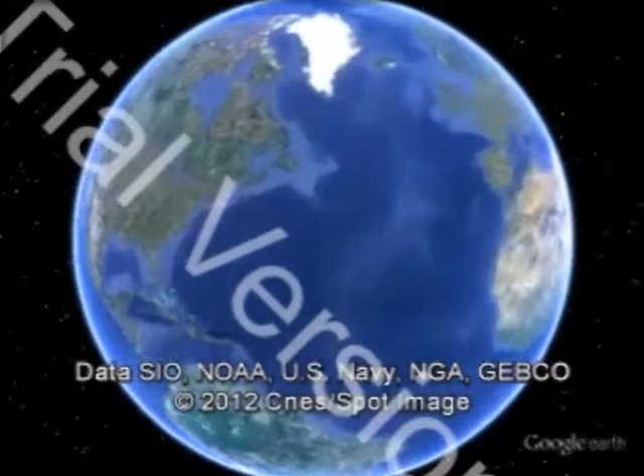The following is a design proposal to turn Mamourah community into a sustainable community. Mamourah is located in Alexandria, Egypt, and the proposal considers issues of sustainability, responding to the necessity to build a city generating its own economy and using green technology and integrating resource-like elements that provoke minimum impact on the surrounding.

This will be done using the 3 pillars of sustainability: social, economic, and environmental. The city will encourage people to walk instead of driving, and give facilities for recycling and optimizing the use of green technology, turning Mamourah into a sustainable, zero-carbon digital city which encourages a knowledge society.

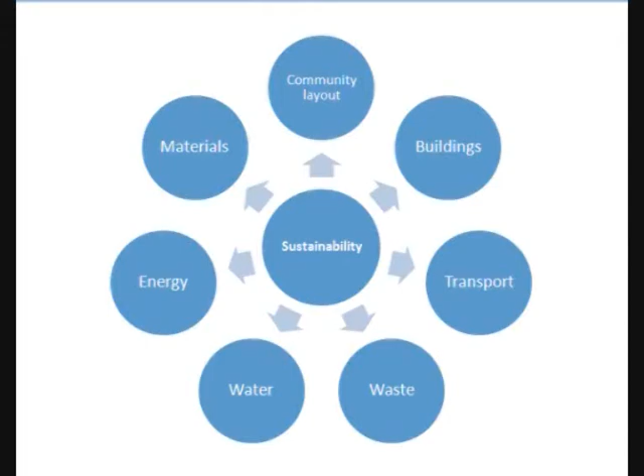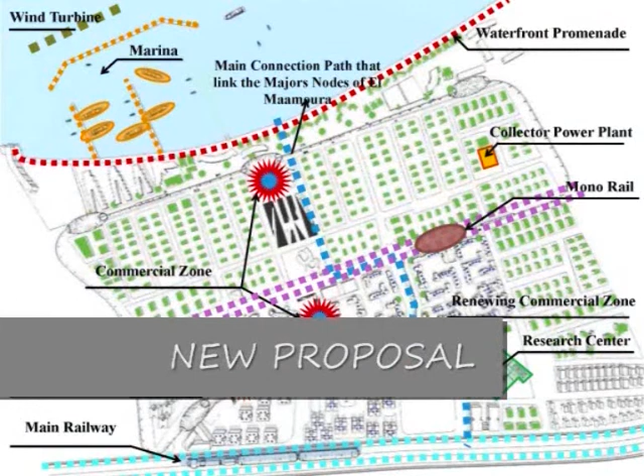This will be done using 7 main principles of sustainability under the categories of LEED, which are community layout, buildings, transport, energy, water, waste, and materials, to turn the old proposal and master plan of Mamourah into a new proposal which encourages a pedestrian-friendly community.

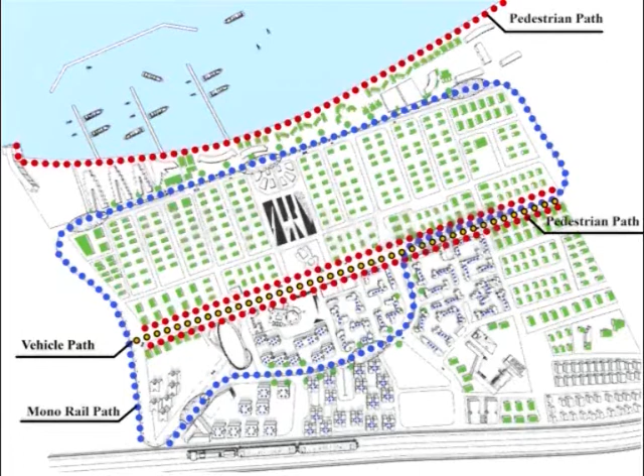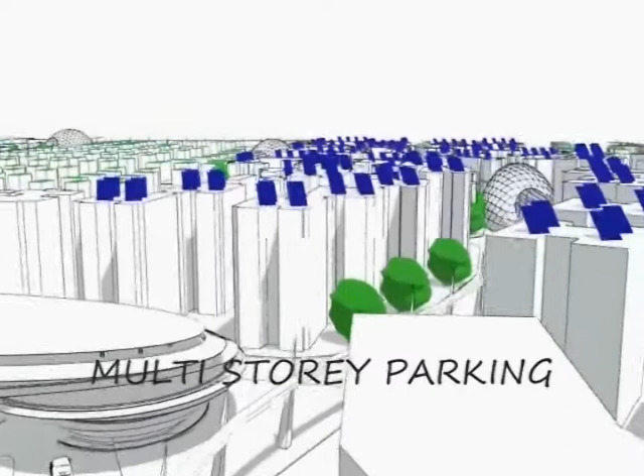The proposal depends on using the main train in front of Mamourah and connecting it with a monorail. Passengers either enter Mamourah by car and park in the multi-story parking, or use the monorail or eco cars.

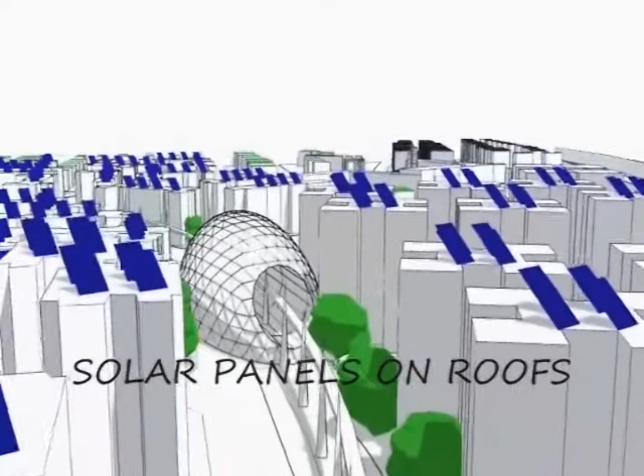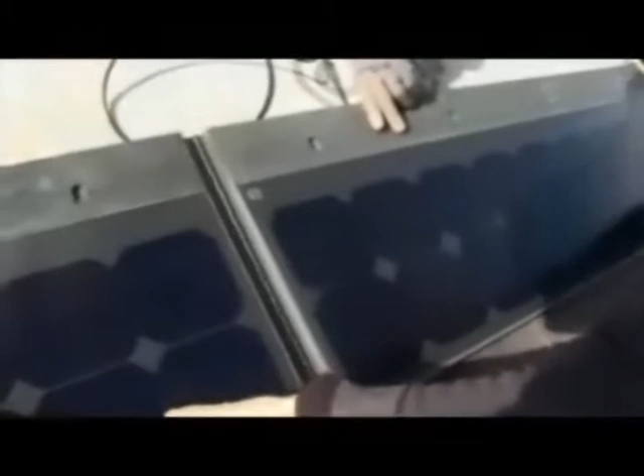Buildings are roofed by solar panels or green roofs. The solar panels help reduce the consumption of energy by buildings, because they produce energy which can be used and consumed by the building.

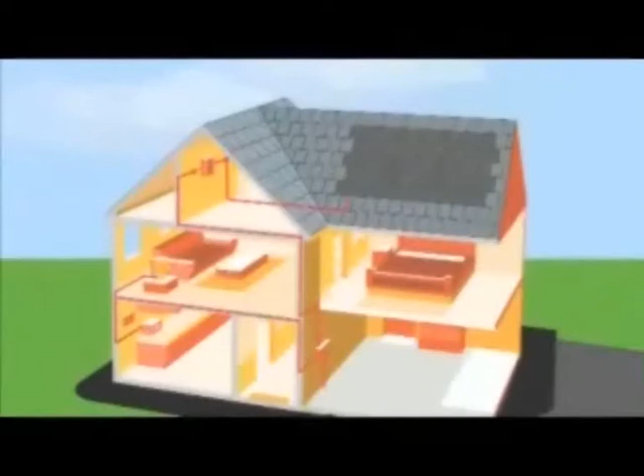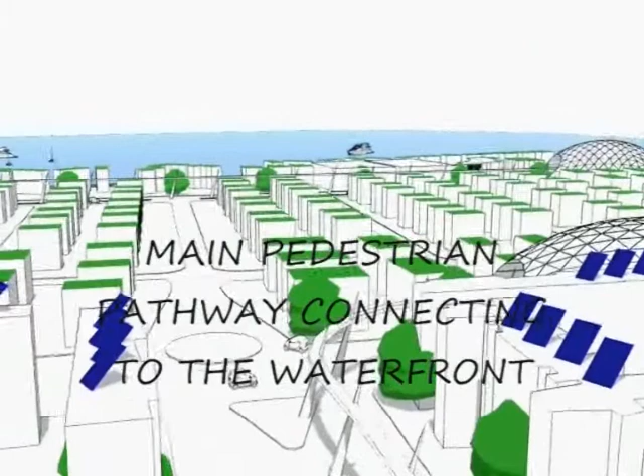Afterwards, as we walk through, there are monorail stations at important commercial nodes. These stations connect the commercial nodes of Mamourah, which encourages tourism and helps increase the economy of the place, underneath which most of the streets are left for pedestrians.

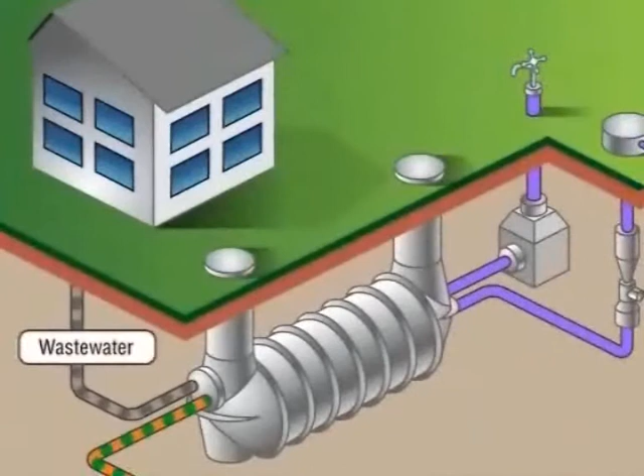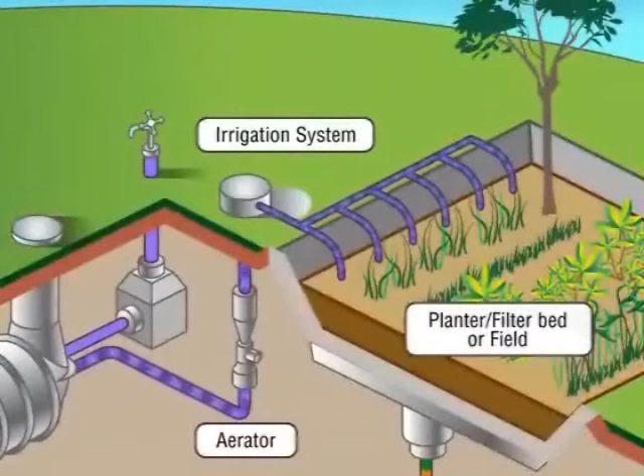Excess rainwater or wastewater from buildings is collected in a collector or a cistern, where water is treated and afterwards used for irrigation, thus reducing the consumption of water in irrigation.

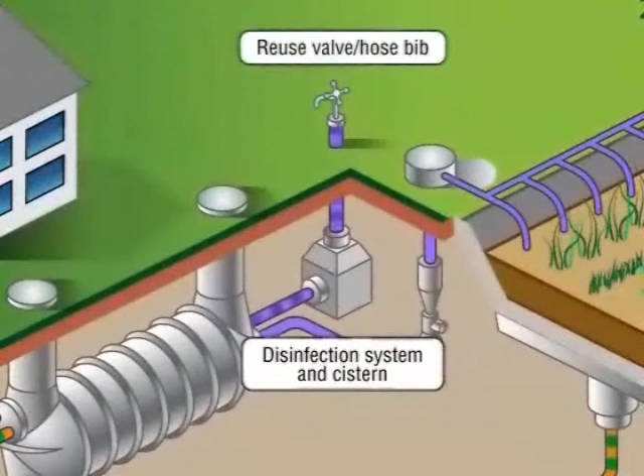Because there is a high quantity of water consumed in irrigation, by this we are offering another way of irrigating the agricultural lands or the green areas in Mamourah.

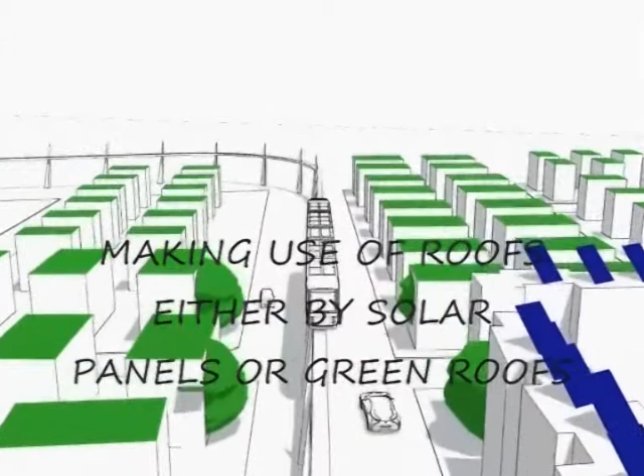Other roofs are green roofs, and by this we can also use the excess water of the green roofs by making a water management plan for them.

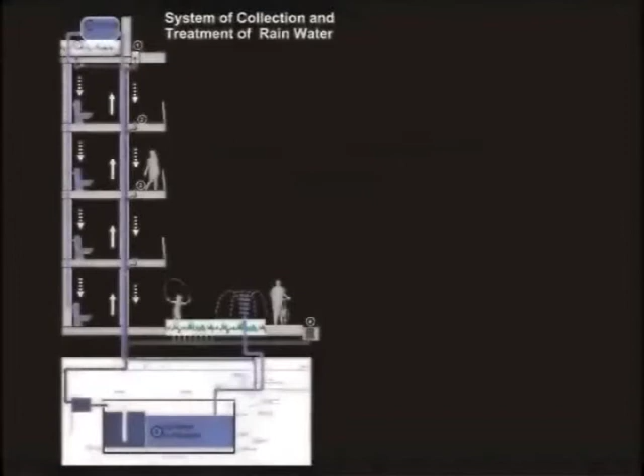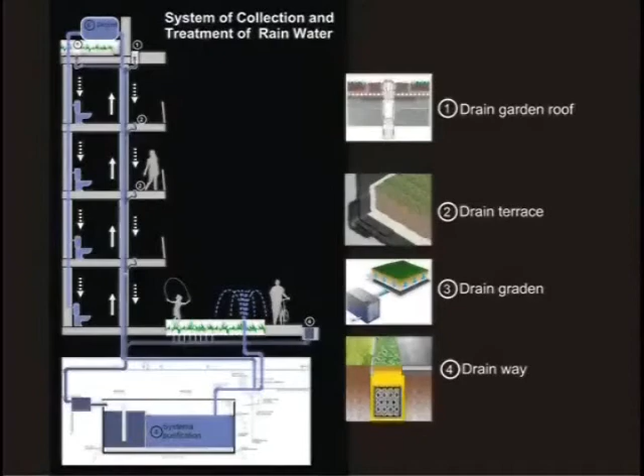This can be done by collecting the water in a collector underneath the building and then reusing it in irrigation, which is another solution for irrigating the green areas in Mamourah. This is a way of a water management plan.

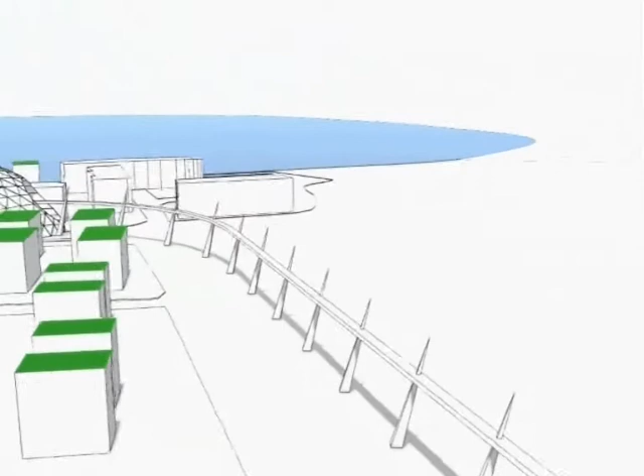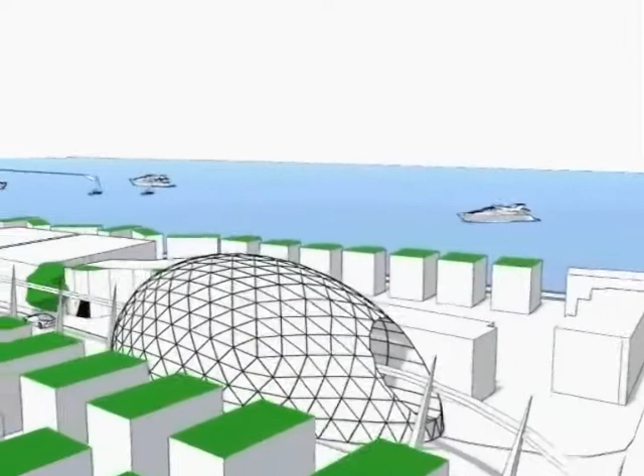As we walk through the agriculture, we can make use of the agricultural lands beside Mamourah with a new agricultural research center, which can conduct research on agricultural crops in Alexandria. We can also use the botanical gardens beside Mamourah for tourist visits.

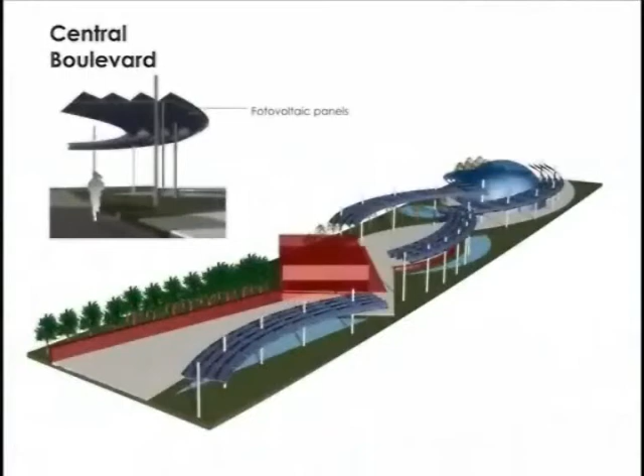As we walk through the main street before the waterfront, we can see it is surrounded by pedestrian walkways shaded by photovoltaic panels. The street lighting used is also energy independent, covered by solar cells which work in the morning, and at night this solar panel offers energy for the street lighting to light itself independently.

Afterwards, as we walk through, there is another proposal for a marina, providing another way of water transport and thus reducing the dependency on transport inside Mamourah. This also increases tourism, and there is another proposal for reducing energy consumption by water plants.

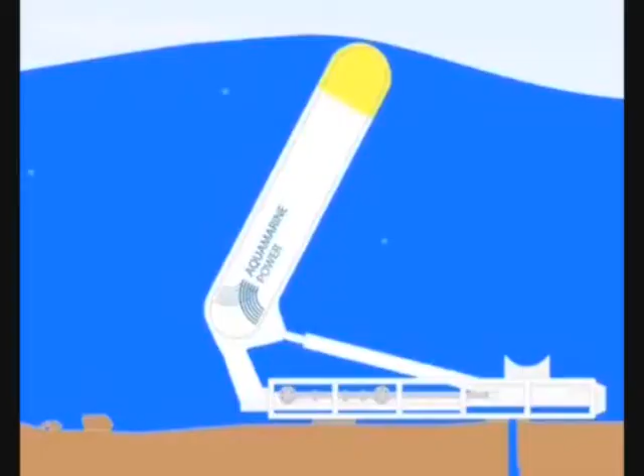This can be done either by wave energy or by tidal energy. This plant can use wave energy or tidal energy to produce electricity. With tidal energy, the moving of tides back and forth moves motors, which turn the kinetic energy into electricity—a way of producing energy from renewable sources that already exist.

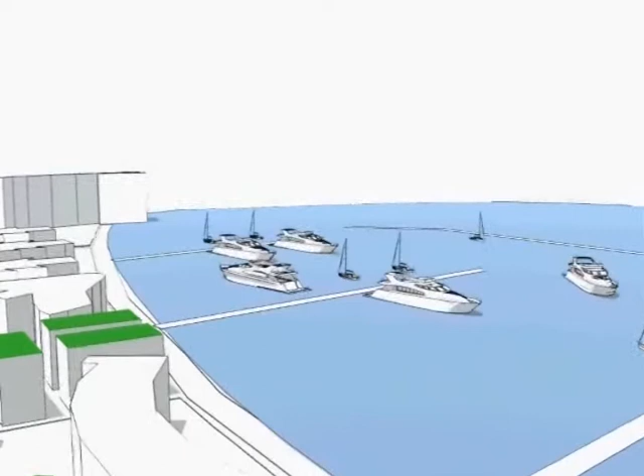There is another proposal for making use of renewable energy from wind turbines. Building wind turbines in the deep sea will produce another form of energy.

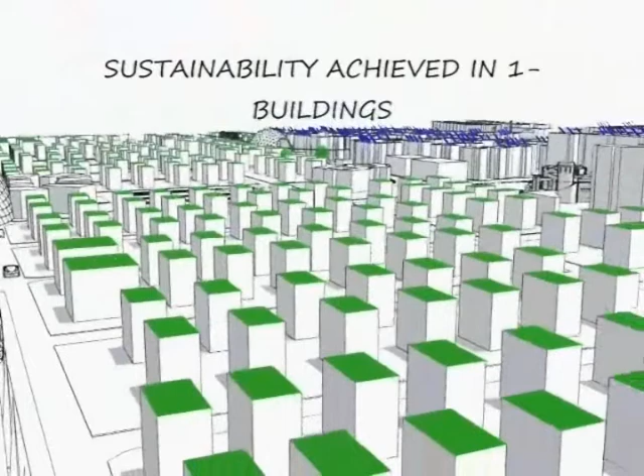All these types of energy can be further collected in a power plant, which distributes the energy around Mamourah buildings. Sustainability is achieved in buildings by reducing water consumption and energy consumption.

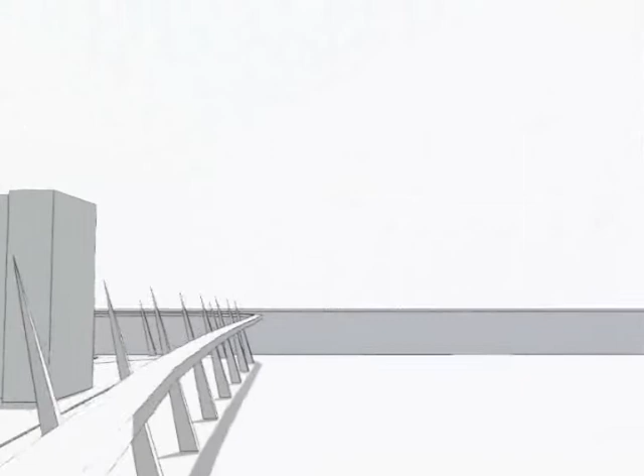Sustainability is achieved in transport by depending on economical and eco-friendly transport like monorails and eco cars. Sustainability is achieved in water by water management, and in waste by waste management.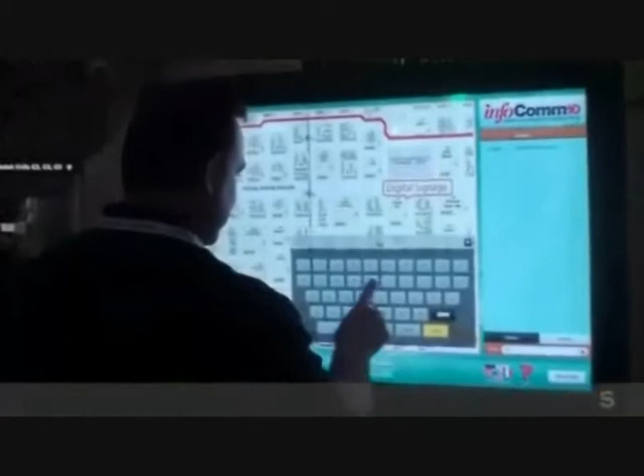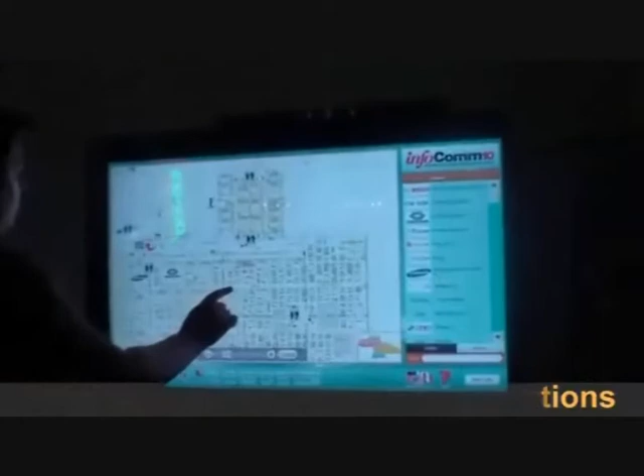We will encourage digitalism by using digital screens for advertisement or wayfinding. Also, waste collection points with waste division and recycling to reach a zero waste, zero carbon, and fossil fuel free Mamourah sustainable city.